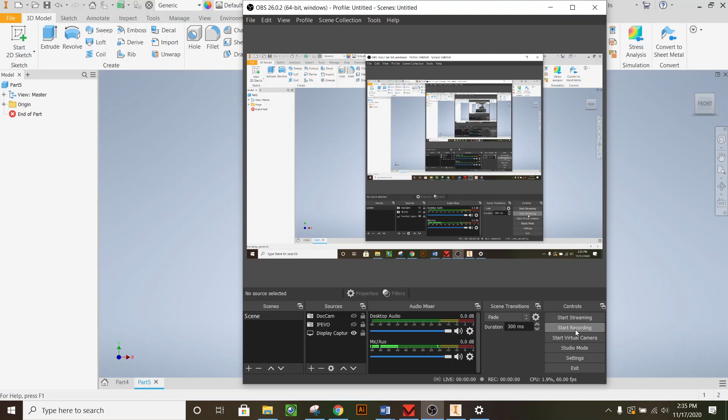All right, so here is the big red Lego block. This one's going to be a little bit more tricky. It has a lot more measurements in it.

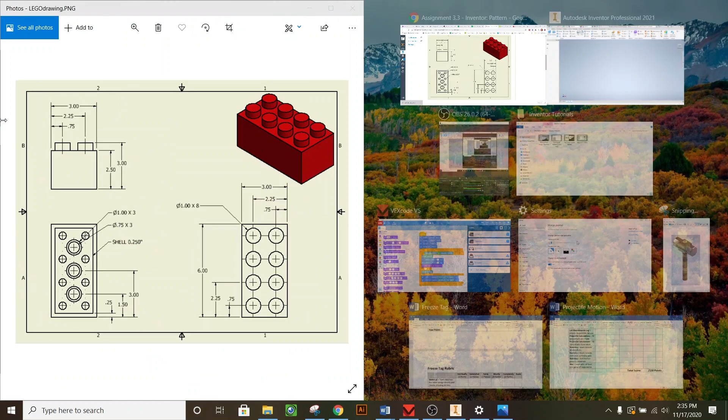So I'm going to keep this. I'm going to open this in a new tab. Oh, okay, downloaded it instead. That's fine, I'll just put this over to the side like that. And I'm going to have Inventor open right here. I'm going to scooch this over a little bit so I can see both of these at the same time.

Like that. All right, so I'm going to start a sketch. I'm going to pick the bottom surface, and I'm going to build it straight up. So I'll use the rectangle tool, bottom corner, and it looks like if I look over here to this panel on the left, it is 6 inches long.

So I'll say 6, or sorry, yeah, so this is giant. We're doing a giant Lego brick. That kind of scared me for a minute. 6 inches is big for Lego.

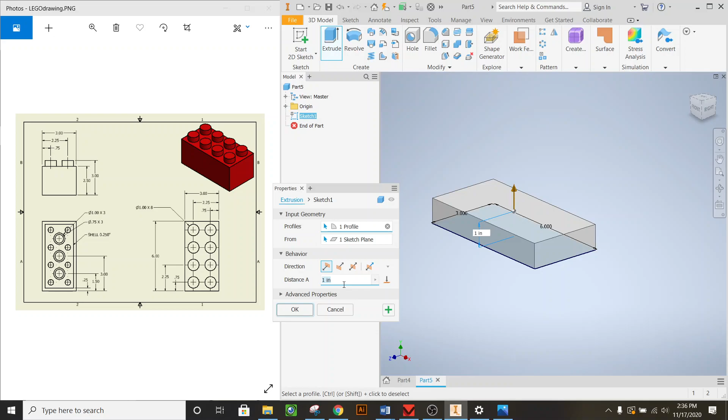So tab, and then 3 inches wide, enter. There it goes. So we'll say finish sketch and extrude. Extrude this up, looks like my window's over here. I'm going to bring it up 2.5 inches.

So 2.5, enter. There it is. And now I can start doing the circles on top, the little nub things. So I'll start a sketch on the very top surface. And I'm going to go circle.

I'm going to drop it here in the corner. And it looks like it has a diameter of 1 inch. And over here, so I'm going to click 1, enter. And right here where it says 1 inch times 8, that just means that this diameter is repeated for all 8 of these nubs. So rather than having 8 iterations of the same dimension, you just say times 8. It's just a little nice shortcut.

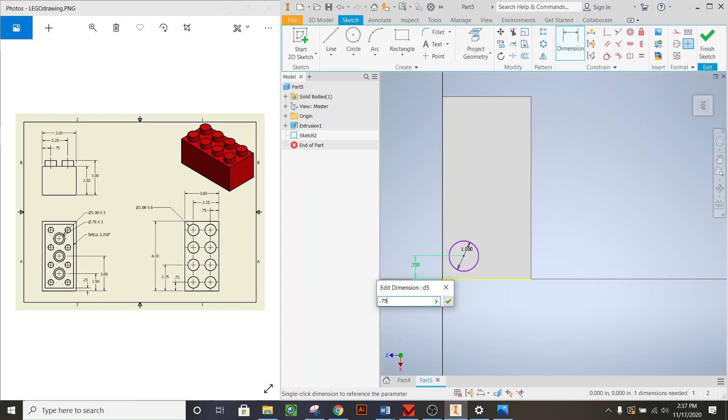All right, so then I'm going to go dimension tool. I'm going to try and center this. And whenever we center circles, we reference edges and center marks. So we go center mark, edge, and it appears that it is 3/4 of an inch, so 0.75. Enter. Do the same thing from this spot and that spot.

And the cool thing about Inventor is it will do math for us in the dimensions. So if I knew it was 3/4 and I didn't want to do the math, or I couldn't figure it out, I could just write 3 divided by 4 and hit enter. And it will automatically change it to 0.75 for me, which is pretty nice. So if you have like 3/16 or 3/8 or 7/8 or something weird like that, you can just type that in and it'll calculate it for you.

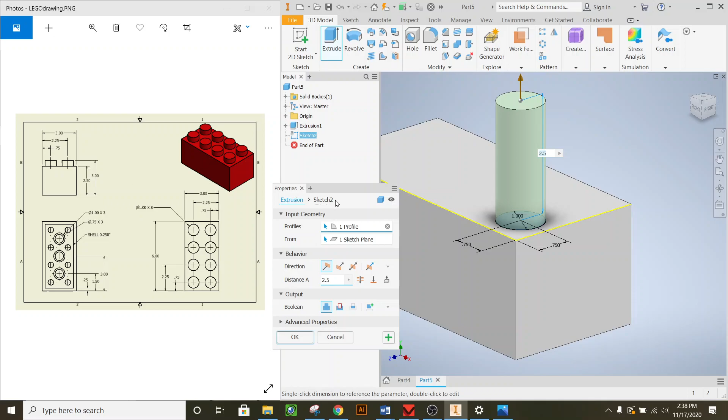Okay, so finish sketch and extrude. I'm going to bring this thing up just a tiny bit. This one we have to do a little bit of math on the left side. The brick is 2.5 inches tall, but the whole thing is 3. So we just subtract 2.5 from 3, and we know that that is 0.5. Enter.

And then go to the top, and we're going to do our rectangular pattern again. So right here we've got pattern, rectangular pattern, click right here, define my direction 1, click the red arrow, click this edge, make sure it's going in the right direction, and it's not, so I got to flip it. Let's go flip. And then it looks like these are spaced out.

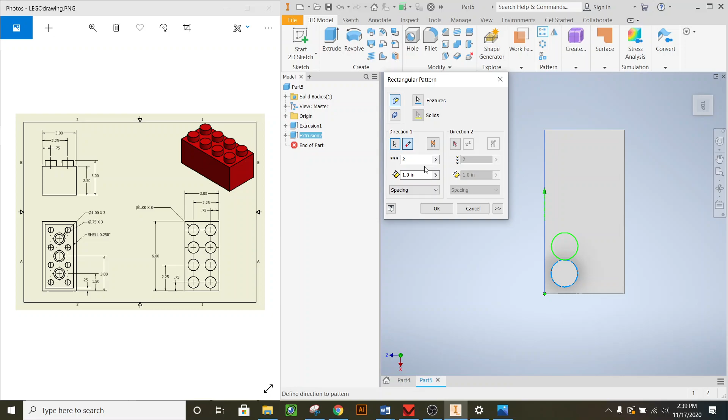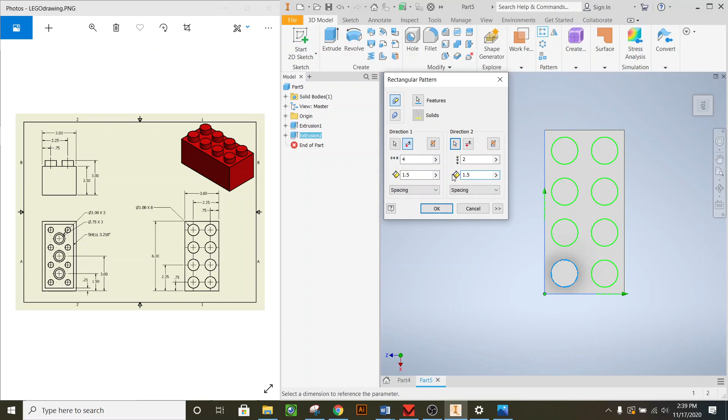So we've got the nice overall shape for the Lego brick. Now what we're going to do is come down here on the bottom, and I'm going to use the shell tool to hollow this out. It says right here in the corner that the shell is 0.25 inches, so it's a quarter inch.

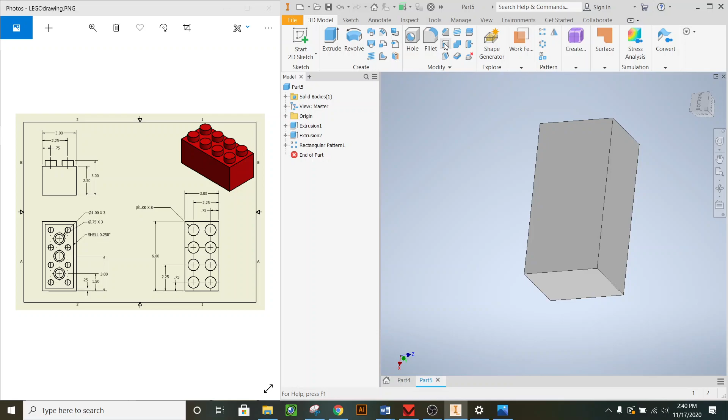So go shell, right here, one that looks like a hollowed out block. Click the bottom surface, and before I click OK, I got to change the thickness here to 0.25 and hit enter. Voila! Look at that. It even hollowed out the nubs for us, so we don't have to do any extrusions there.

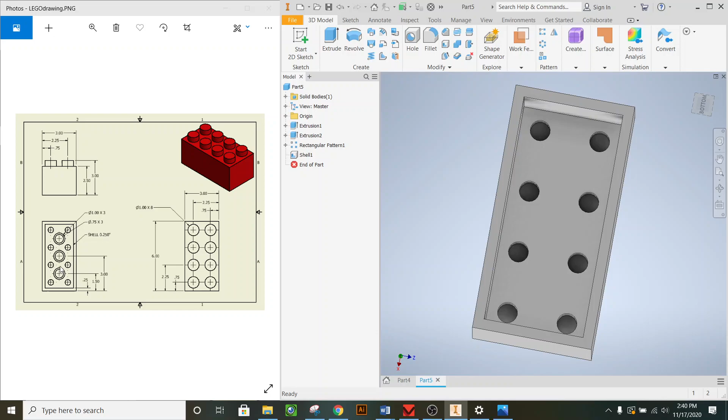So the last little bit is right here, these little circle things, these little towers that go in the bottom. I'm going to start with a sketch on this bottom surface. I'm going to draw a circle, and guess kind of where the closest to the center is right here. It looks like it has a diameter of 1, so say 1, enter. Then it has another circle on the inside that is a diameter of 0.75, so 0.75, enter.

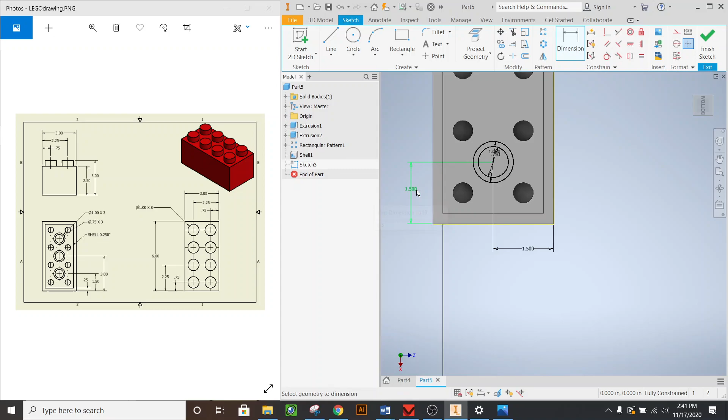Now I'm going to reference the edges to center the hole. So it should be at 1.5 for the halfway across. And then how far from the end? It's probably the same thing, 1.5, enter. Okay, so we'll say finish sketch, extrude.

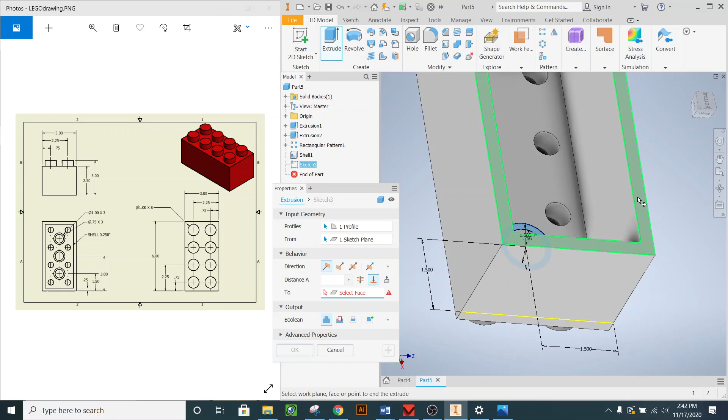Just not the whole thing, just the outer ring. And this one, I'm going to show you another trick here. I don't really know how far it's supposed to go, and I don't really want to do the math for it. So Inventor has this nice thing with your distances. If you click To right here, you can click another surface and say I want this to extrude to be level with this surface. So I'll click the bottom of the brick, and it will automatically get the right length. Pretty cool, huh? So I'll say OK.

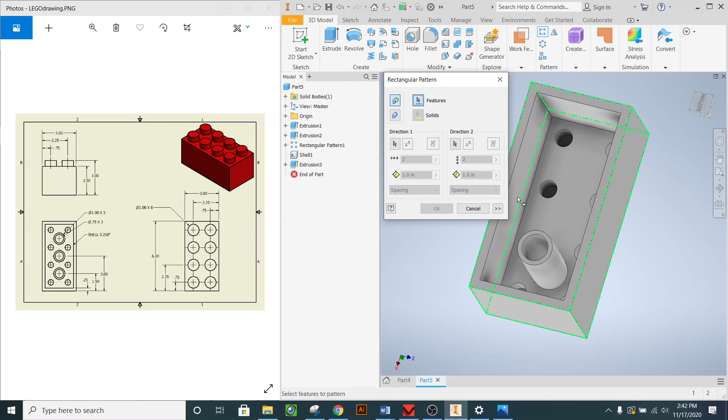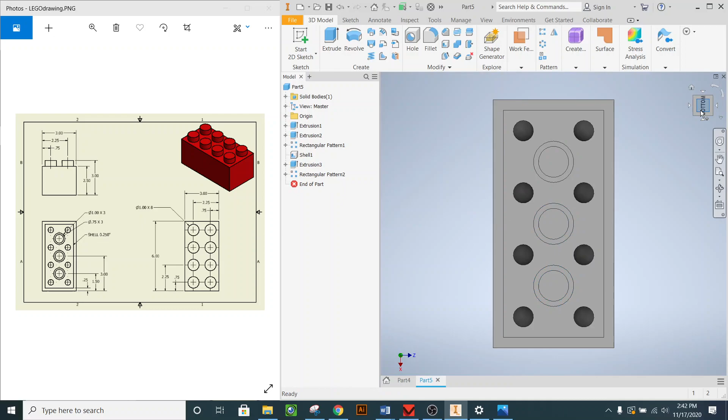Now we're going to do a rectangular pattern, but we're just going to use one line, so it'll become really just a linear pattern. So we'll say rectangular pattern, the feature, this one, direction, I'll use this line right here, and make it 3, so 3 iterations. And I believe the spacing is going to be 1.5 again. I think that's right, let me just check from the top view. That looks good. All right, and I'll click OK. There it is. We have made a giant Lego brick.

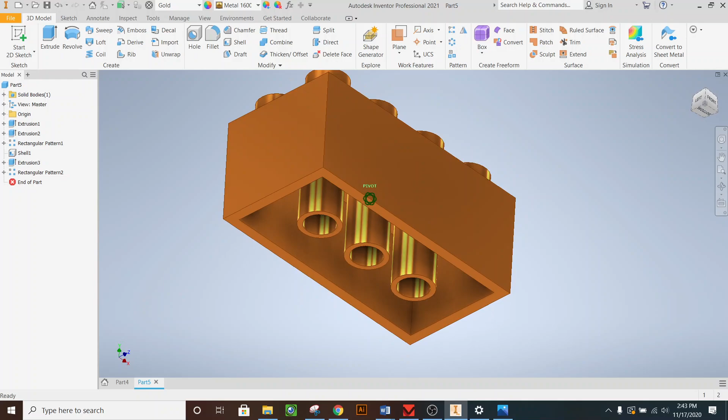Pretty dang cool. So the last step, of course, if you want to change the color or the material, I'm going to make this large so you can see this again. I'm going to go over here to generic, click the dropdown. I'll make it gold. Sweet, golden Lego brick. Maybe silver, might look kind of nice. Sometimes you can get a polished chrome, which is nice. But you can always play around with it and get some funny ones, like here's concrete.

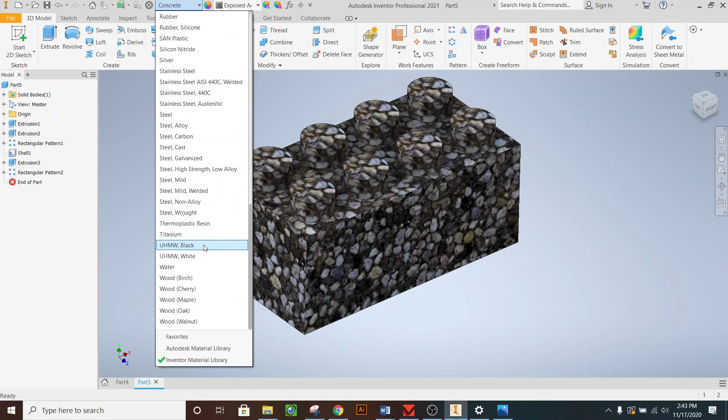Looks more like gravel. How about... well, here's like oak, so wooden oak Lego brick. Kind of cool looking. Anyway, so that's how you do the brick. Nope, wrong one.